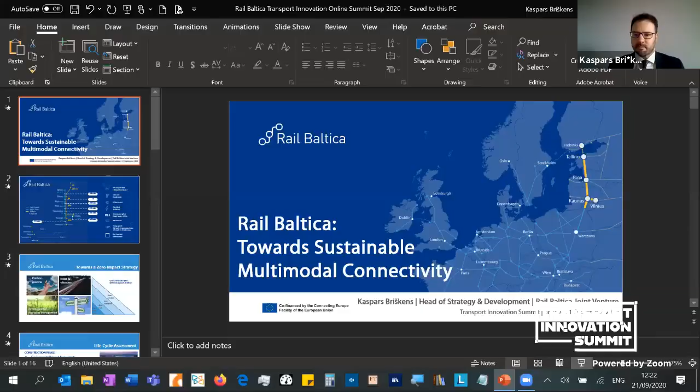Thank you very much, Norman, and many thanks to the Intelligent Transport magazine for providing us with this wonderful opportunity to take a few moments of your time to introduce the railway mega project in Northeast Europe, in the Baltic states, and also to describe in some detail our approach to sustainability. Allow me to share my screen and share a few slides with you. Right, I hope you can see the slides now.

So Rail Baltica is what we call the project of the century for the three Baltic states, because in terms of the sheer size, the volume, and also complexity of the project, there has been nothing of that kind in at least the past 100 years. So in many ways, because Rail Baltica is a greenfield railway mega project, we have the possibility of also developing a sustainability strategy with a life cycle perspective in mind.

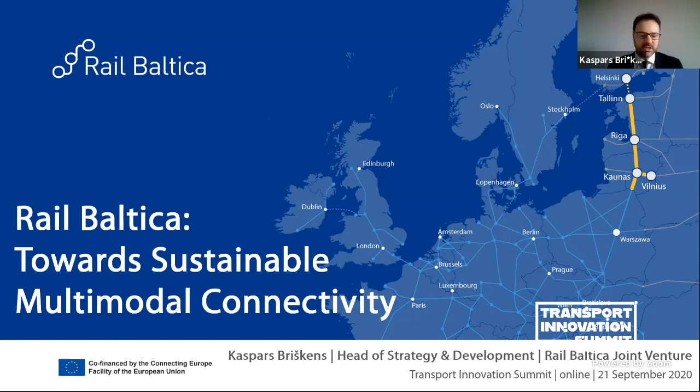And what is very important, even though the name is Rail Baltica, we certainly view Rail Baltica as something much more than a railway project, certainly more than just a railway construction project. Because as a super connector across the three Baltic states, also connecting Finland, connecting Poland and the wider region, it is very much about multimodal connectivity, and of course making it as sustainable as possible by capitalizing on this very unique greenfield opportunity.

So here are some of the key highlights of the project. The line itself runs almost 900 kilometers and almost entirely greenfield. It's European gauge, as opposed to the existing railway system in the Baltic states, which is wide gauge, 1520 millimeter. It runs from Tallinn, the capital of Estonia in the north, all the way to the Polish-Lithuanian border. And then on the other side of the Polish border, our friends in Poland are developing their connection, upgrading and building new alignment between Białystok and the Lithuanian border. So that is what is known as the wider Rail Baltica corridor.

And the Baltic joint venture that I am privileged to represent is taking care of the developments inside of the three Baltic states. So coming from Tallinn through Pärnu, which is the number 4 city in Estonia, to the city of Riga, also connecting Riga International Airport, then continuing into Panevėžys and Kaunas on the main line in Lithuania, and continuing then to the Polish border, with a spur line between Kaunas and Vilnius to enable a connection between the three capitals.

It's a mixed-use line, so it's a high-speed corridor for passenger traffic with speeds of up to 250, which is by any metric high speed here in the Baltic states, as clearly there is no connectivity at such level and such speeds. But also, it will have a very important freight component, with speeds of up to 120 for freight trains, and very importantly, also advanced parameters to enable high capacity freight shipment, also to encourage a lot of modal shift and modal integration.

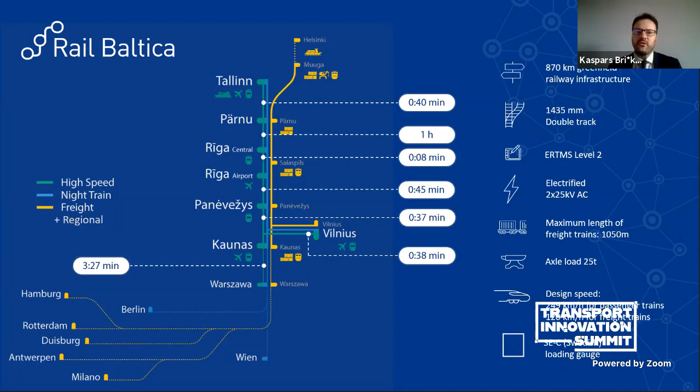One of the facilities will be located in the port of Tallinn, the port of Muuga. That will serve as the critical interface with Finland, as Finnish import and export is one of the key sources of future freight for Rail Baltica. And then also terminals in Latvia and in Lithuania.

Because we are a greenfield, of course, that allows us also to put in place a sustainability or a low impact or impact minimization strategy across the life cycle. And we are today in advanced design phase. As of next year, large scale construction works will also start in some of the point type objects, such as a few of the 7 large international stations that we will develop, but also, of course, increasingly and gradually on the mainline track sections.

Again, this is a line which is a double track line, ERTMS equipped, fully electrified, and of course, almost entirely greenfield. So certainly we will be looking towards the farther future into carbon neutral operations, hopefully with a 100% renewable energy use. We will be looking to minimize the noise and vibration impact. Of course, also waste minimization, environmental resources management.

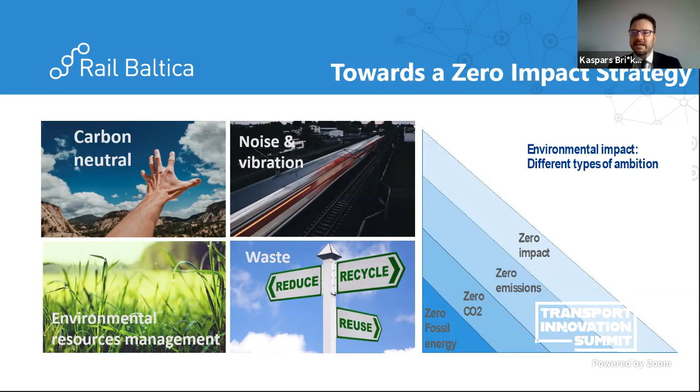And in terms of the level of ambition, if you go from zero fossil energy, which would be a relatively modest level of ambition for a greenfield project like Rail Baltica, and if you go further, we of course want to push that boundary and strive as much as reasonably possible towards zero impact.

And then in terms of the life cycle assessment and planning of our sustainability strategy, we differentiate, of course, between the delivery phase, the construction phase, which we're currently at, and the operational phase. And the construction phase is, of course, very much related to the environmental impact assessments underlying the route alignment, underlying the different point type objects.

And then, of course, going forward, we are thinking in great detail as to how do we optimize from a sustainability point of view our construction sites, in order to make them as compact as possible, in order not to interfere with the different protected areas, including environmentally sensitive areas. That also involves considerations related to the access to those construction sites, the traffic organization, fencing, security, and other elements.

At the same time, waste management and pollution, anything ranging from waste storage to wastewater, rainwater, hazardous material management, construction waste management, and again, also noise, vibration, and of course, dust and particle pollution. Those are critical considerations, especially during the construction phase, and especially taking into account that some of the elements of our infrastructure will be done in highly dense urban environments, including the international stations, and of course, the line segments connecting these important urban nodes.

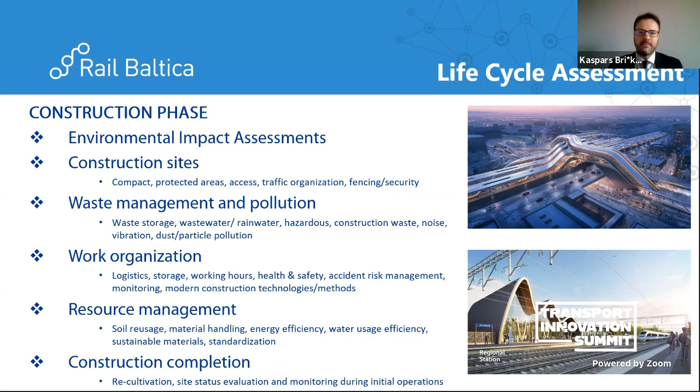And then of course, upon the construction phase completion, it is very important to continue site evaluation and monitoring during a few years of initial operations, just to ensure that the soil and the environmental conditions are safeguarded also during the early operational phase.

And then going into the operational phase, there's a slight delay on the slides, but one of the pictures that I'm featuring here is a Zaha Hadid rendering of one of our international stations, the Ülemiste station in Tallinn, which not only would be an architectural beauty, but has very important sustainability considerations underlying it, ultimately one of the signature stations along the entire Rail Baltica.

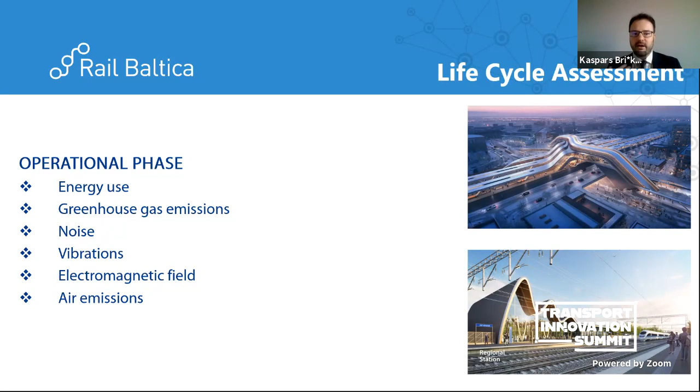But in the operational phase, this is not just about the traction energy. Again, this will be a 100% electrified line, but equally so, it is also about minimizing emissions, noise and vibrations, also electromagnetic field, the air emissions, particle emissions.

And just like during the construction phase, critical considerations related to water management, chemicals management, vegetation control, and also soil pollution management, and of course waste management and biodiversity and nature impact preservation.

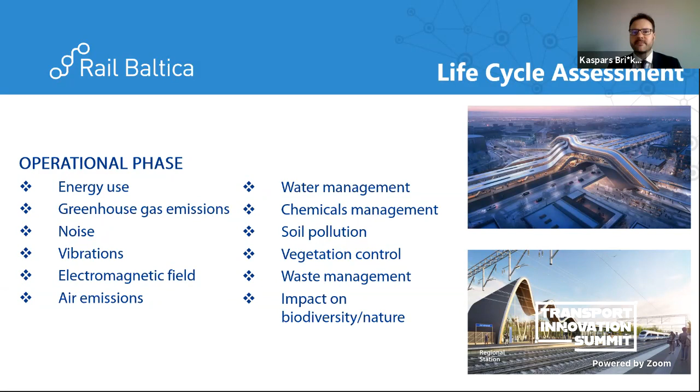And all of these we are considering already now, because as a greenfield, we have that ability, instead of working in a brownfield environment where we have to take care of maybe obsolescent infrastructure, obsolescent technologies, and that adds additional complexity into delivering a low impact infrastructure. In our case, we can take that ambition one level higher.

But in our view, and that's also the Rail Baltica philosophy, we are delivering Rail Baltica into a multimodal mobility ecosystem. So it's just one element in the wider either multimodal logistics supply chain or a multimodal passenger journey, where rail is one element in the wider chain.

But at the same time, in the Baltic states, currently there is no feasible rail connectivity on the north-south axis, that is across the Baltic states from north-south or south-north, neither for passengers nor for freight. So clearly the potential for modal shift is enormous.

Just to give you a few benchmarks, there are more than 5,000 trucks daily crossing the border between Poland and Lithuania. So that gives you an estimate of the intensity of truck traffic along the Baltic states. You have Baltic import-export traveling on that route, you have Finnish import-export traveling on that route, in parallel to the short sea shipping routes, which are also traditional gateways for Baltic or Northeast European trade channels.

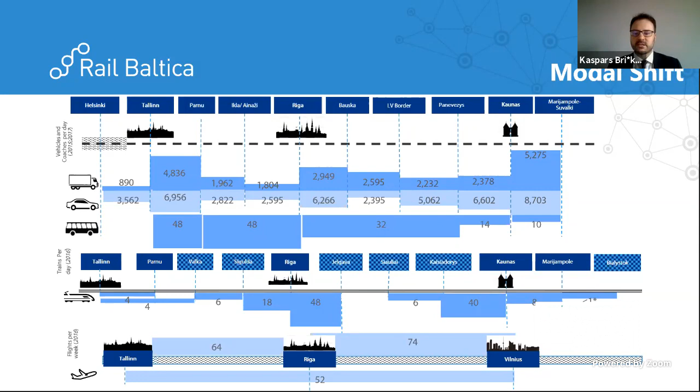And through that also encourages not just the modal shift per se, but a more sustainable distribution of different elements across the supply chain or the logistic chain. So when we talk about freight, clearly we are looking mostly for general cargo. That will be the bread and butter of the Rail Baltica line in terms of freight. So a lot of that is intermodal, either between the existing wide gauge system and the European gauge, or truck or road-rail intermodal, including options for piggyback traffic, unaccompanied or accompanied.

We are studying these options, and also a lot of options for less than wagon load. So not every freight owner and not every logistics integrator has the capacity in the Baltic states to form a block train, even though we'll have a fair share of those. But very important to also take care of less than wagon load. So that is absolutely critical.

To enable that is to have these terminals with dry port functionality. Some of those will be directly connected to maritime ports. Again, they will be located on the crossroads between the existing wide gauge and the European gauge. And that in itself should facilitate that, as much as possible, the haul should be as long as possible, and the economies of scale of rail freight should be taken care of.

At the same time, also promoting a strategic cooperation with the trucking industry. They're allies, they're not just competitors, because of course first and last mile distribution is absolutely critical also to enable that, to encourage that modal shift. Otherwise, rail is oftentimes not competitive, especially with the fact that there is not really yet a level playing field also in terms of legislation between road and rail.

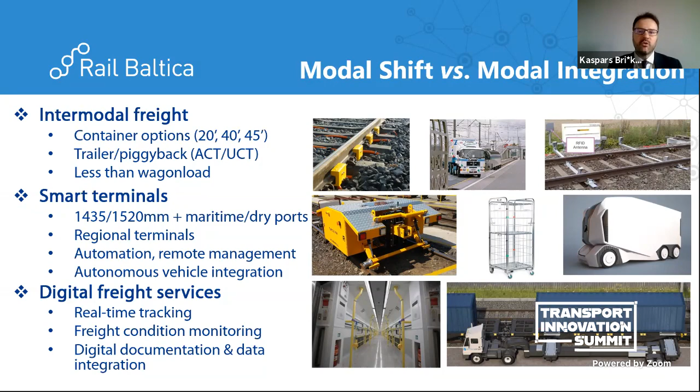And digital integration, not just on the rail portion, but across the multimodal supply chain. So railways should be able to talk to the trucking industry, to the air industry, to the maritime industry, and that should work as one unified supply chain solution for the ultimate freight owner or the lead logistics provider.

And the final slide on air to rail connectivity. Again, there's a lot of discussion about rail replacing air passengers. There's certainly a place for that, especially for short haul and ultra short haul flying. And clearly there's a potential of that in the Baltic states. But equally importantly, it is also to ensure that air and rail are fully and seamlessly integrated.

And as a greenfield, we have that opportunity to put infrastructure in place to actually enable future seamless intermodal journey opportunities for the passenger, including with things like interline and code share single ticketing between the rail operators and airlines, single check-in for the entire journey.

Also, we are working on integrated baggage solutions, especially with regard to our international rail stations. You should be able to drop your bag in any of the Rail Baltica international stations and then go to any of the airports along the Rail Baltica route and receive your bag in the final destination. As long as the business case is there, we will put the infrastructure in place to enable that.

And equally so, this is my final remark on the intermodal logistics side. Clearly, there are major opportunities for air freight integration, especially with the rapid development of e-commerce, also high value-added logistics services, including reverse logistics, customs processing, also smaller industrial operations like assembly logistics, labeling, packaging.

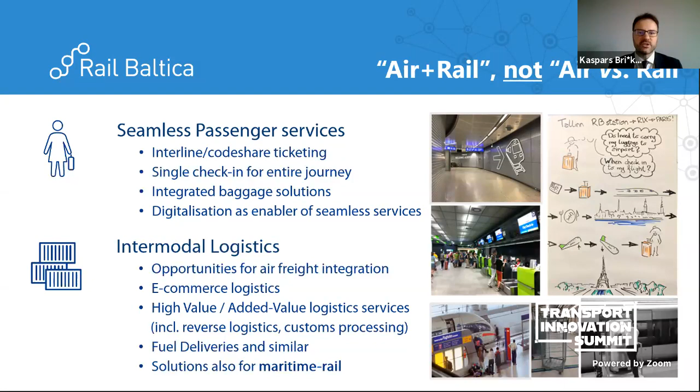Thank you. Kaspars, thank you very much indeed. A very ambitious programme, and good to see that so much thought's been given not just to proper planning, but also to the environmental sustainability of what you're planning to take forward. And that leads me on to another ambitious programme, which we're going to hear about from Rob Paris, Head of Sustainability and Consent at Crossrail Limited, which is of course the new line across central London. Rod.

Thank you, Norman. Good morning, everyone. Right, I'm just going to get all these tech pieces out of the way first. And that should get the screen share up. Good. And one final click. Who knew that the most daunting part of a presentation might be clicking some things as opposed to giving the presentation itself?

So I'm going to talk to you about Crossrail and carbon reduction this morning, but the first thing I'm going to do is not assume you all know exactly what Crossrail is and just do one slide of introduction, setting the context framework on which the rest of the presentation should sit nicely.

So what is Crossrail? It's a new railway scheme, not a new tube line as some people think. It's a metro style stopping service running across London and the southeast. And it consists of two main parts, a surface section, which you can see here in blue, and that is located on primarily existing railway corridor, mostly the Great Western Main Line and the Great Eastern Main Line corridors.

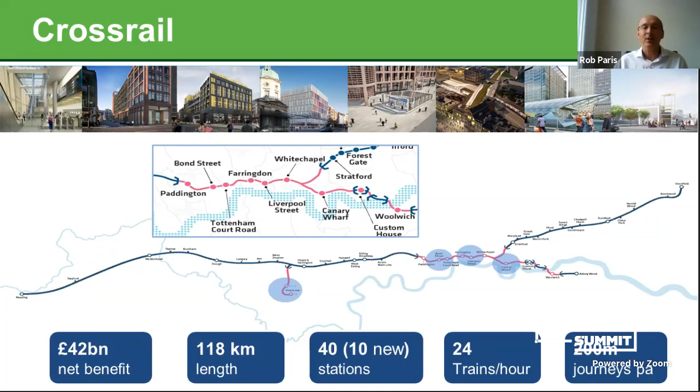Last piece of useful context. The powers and the deemed planning permission that enable us to construct Crossrail come from an Act of Parliament. It's known as a hybrid bill scheme. Some of you may be familiar with things like Transport and Works Act orders or Development Consent Orders, but our powers come from an Act of Parliament. So like High Speed 1 before us, and indeed High Speed 2 now.

The reason I emphasise that slightly is because the Crossrail Act 2008, that's when it got royal assent, was the same year, of course, as the UK got its Climate Change Act. And it's worth reflecting that in the years that have passed, now there are a lot more tools, drivers, policies and experience that have helped facilitate carbon reduction. But back when we were kicking off, moving into a delivery organisation, a lot of that didn't exist or was very much in its early stages of evolution. So there was a lot of learning to go through.

We put together a carbon footprint policy in 2009. And we had a certified EMS by 2010, within which we put energy and carbon footprint reduction targets and objectives, and some of those will come out as this presentation progresses. So also in 2010, that's when we really put together our main baseline carbon footprint.

Crossrail has a design life of 120 years. So it came as no surprise that almost 80% of the carbon footprint for Crossrail comes from operation. And the majority of that is through locomotives and operating a passenger service, and only a very small percentage of that is the actual energy consumption of the infrastructure in the stations, the shafts and the portals. Crossrail is actually powered by the grid, so it's very much dependent on the grid mix as to how that carbon footprint comes out. And in construction terms, you'll see that in round numbers, about 20% is construction carbon or capital carbon as it's considered.

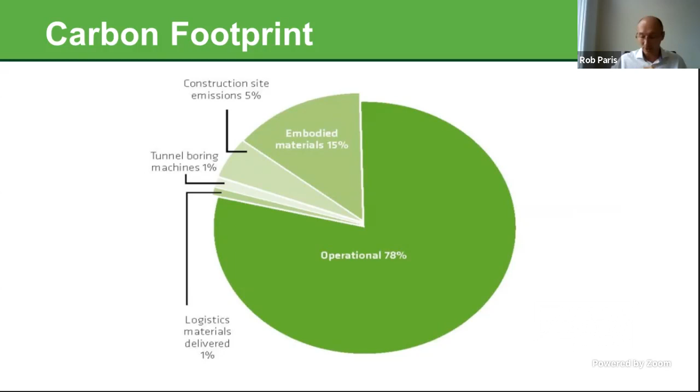And the final thing to note is that when we did that carbon footprint, we replaced a lot of old diesel passenger services. So in comparison to a do nothing scenario or a do minimum scenario, there was going to be a carbon saving by the operation of Crossrail. And that meant that in round numbers, between 8 and 13 years, we could get a carbon payback on the construction, which is a very fortunate position to be in. And that range just depends on things like assumptions about what the energy efficiency might be of the various trains and what the grid mix carbon will actually be in the future.

So the sorts of things that we could impact upon are the energy during construction, the embodied carbon, the first generation of rolling stock, and the first generation of the mechanical and electrical plant that went into the system itself, the infrastructure itself.

And so taking you to the beginning of that, when we looked at design, we decided to set holistic design targets in terms of sustainability rather than specific. So we didn't have specific energy targets in the design, but for our stations, our central section stations, we adopted BREEAM, Building Research Establishment Environmental Assessment Methodology, a leading methodology in the world today and at that time.

And we set a target for all our central stations of achieving a very good certification, both in design and assessment, and a stretch target of excellent. And for the civil infrastructure, the tunnels, the portals and the shafts, we adopted CEEQUAL, the Civil Engineering Environmental Quality Award Scheme, and we targeted excellent for all of those.

And speaking to you today, where we're at, all of the civil infrastructure has actually come in at CEEQUAL excellent. And on the stations, we're still going through that, but 3 of the stations have come through certification. 2 of them have achieved very good. 1 of them has achieved excellent. The remainder are on target for very good, and 2 of them could possibly achieve excellent too, which would be a wonderful outcome.

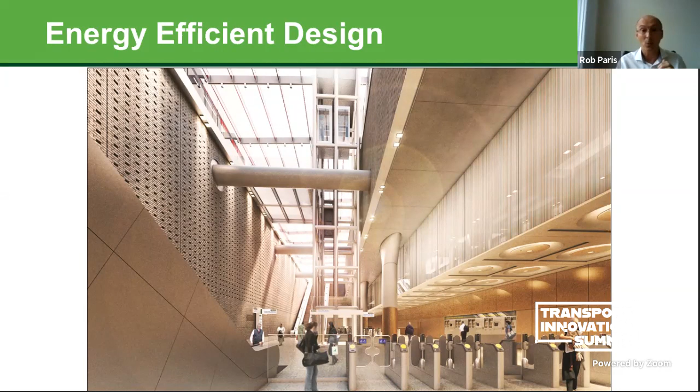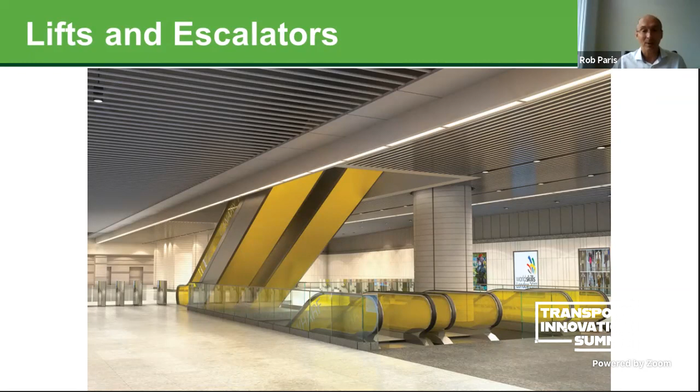Lifts and escalators was another big one that we could affect in terms of specification. Again, go back to that time, we were looking around to see what the baseline was, what good was, and we could see what the London Underground standards were for lifts and escalators. And we specified lifts and escalators that would be about 23% more energy efficient, and again, used LED lighting and these sorts of elements. And whilst we're still in the testing and commissioning phase, it is coming out at about 23%, which is really good. So that's the specification, that's the tech, if you like, inside the stations and the infrastructure.

I've mentioned embodied carbon. Now, Crossrail, for all its complexity, and it is a hugely complex scheme, when you look at the materials, by far the greatest volume is in concrete and rebar. If you're going to build that amount of tunnel and have that amount of subsurface station, there's a huge amount of that that goes into the construction. So on the concrete, one of the places we could focus to bring carbon down was on cement replacement. And we had a minimum standard in all the cement mixes of a 50% cement replacement, but we encouraged all of the contractors to do better than that where they could. And indeed many did. And the top performer was actually Paddington Station again, where they managed a 72% cement replacement with associated carbon reductions.

Couldn't always achieve that sort of level because around the concrete performance, there's requirements you have to meet, and so that affects how much replacement you can put in. And sometimes the curing times can affect that, and depending on how quickly you need it to cure, you can't always go as high with replacement as you'd hope. But those were some of the things we did, and there was quite a big win we had on the embodied carbon side.

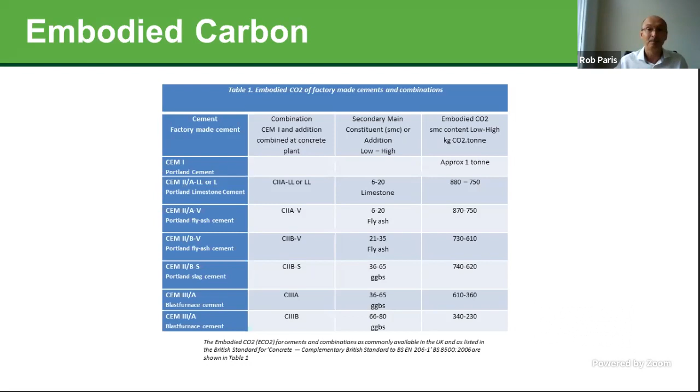Construction carbon, the activity of construction. Now, this was an interesting one. When we were setting up the contracts, we went out to the market and we asked what experience people had, projects had, of setting carbon budgets or energy targets to drive down construction carbon. And really nothing came back at all. There was really nothing that came in, or certainly nothing you could apply to a project that was the size and scale of a railway project

like Crossrail. So we took the approach that once we procured all of our contracts, we gathered all the contractors together and we asked them what they thought would be a fair target to try and achieve. And they came back variously with numbers of between 4 and 8% construction target. So we adopted 8.

And what we also did was, in order to be able to measure that, working again with the contractors, we developed a construction carbon model that we could apply to each site. And each site then had a reference or baseline model that was set up for it. And then when they adopted certain energy efficient technologies like LED lighting or hybrid equipment and plant, that then achieved certain savings. And that way we could track and measure the performance in terms of meeting that 8% carbon target.

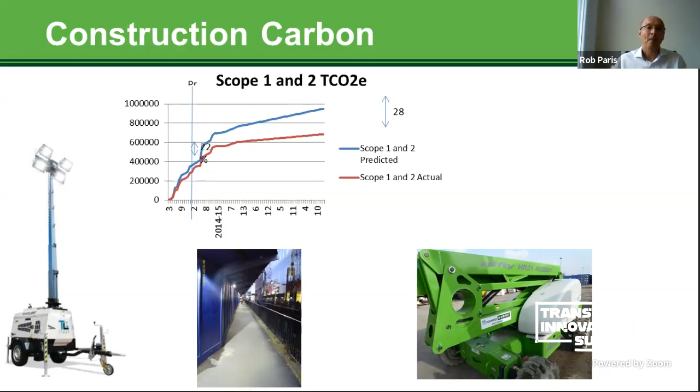Now, because we did this post-contract award, these weren't targets that were in the contract, so we needed a way to facilitate and encourage meeting that target. So I'm going to make a very small diversion, but it is a relevant diversion, as to how we actually encouraged that during the delivery of the project. And that was with something we called Supplier Performance Assessment.

Now, the Crossrail contracts had a lot of requirements in them, and we wanted to know how the contractors were going to perform against those. So the various areas we were interested in are shown on the left: environment, health and safety, commercial, and the other ones there. And so on a 6-month basis, we would effectively go out and audit the contracts, and we would be able to see were they compliant with the contract, non-compliant, or were they even going further, what we call value added. And in some cases, they might even be leading edge in the industry, what we called world-class performance.

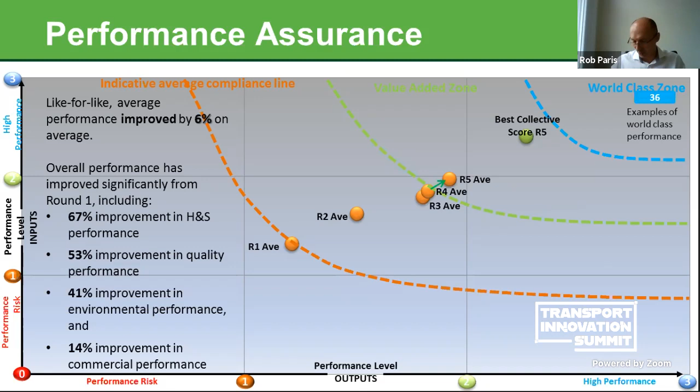And what that enabled us to do was get a graph like this. And here you see over 5 of those assurance assessments, all of the contracts in all of the areas and how they performed. And you can see that on average, we started off at a broadly compliant level that moved up into that value added, and then it slowed. And that's not surprising when you consider what value added means and how difficult it would be to get everything up to world class. And you could break that out into the various areas.

So this is the environmental performance. You can see the averages in the golden triangles there over the 4 periods. But the great part of this was that each contract could be identified individually and its performance tracked on the graph. Each of those blue circles is a contractor. Now, because we put this process in place, again, after the award of the contract, the buy-in we had to sell to the contractors was that we would make it anonymous. So they each knew what their number was, but they didn't know what their peers' number was. That was the deal that got them to buy into the process.

What was fascinating was that the very first time we did this, we had our contractors forum and all the delivery directors from the contractors turned up. And no sooner had we put this chart up than they all started asking each other what number they were. So in no time, anonymity was out the window. They all knew where they sat. And what then developed was this wonderful, healthy competitiveness, because none of them wanted to be seen to be lesser performing than their peers. And that's what really helped to drive that performance that I was mentioning earlier.

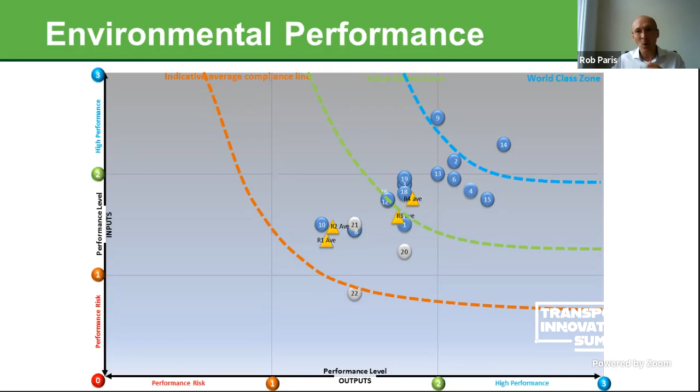And it's worth bringing in a second element that we came in with to facilitate meeting that 8%, which was that at that time we had Crossrail delivery directors, and there was an incentive scheme for them. There were various things in that incentive scheme to drive a bonus, and one of those was achievement of the 8% target. And why do I highlight all of that? Because whilst we set a target of 8%, we actually achieved, in 2018 when we closed that scheme down, 18.6%. So that was a really wonderful outcome in terms of driving down that construction energy.

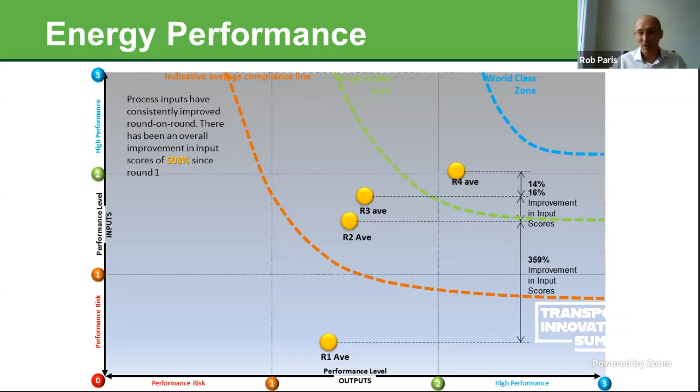On the operation, we set two main targets here. One was train weight. We set a target of 350 tonnes for a 9-car consist. Around that time, industry was going for something like 400 tonnes, so we directed for under that. And an energy efficiency of 24 kilowatt hours per train.

Bombardier, based up in Derbyshire, were the successful contractor for this. They brought some of their aerospace engineering experience to bear, and they smashed that weight target, coming in at 319 tonnes. Our new trains are 319 tonnes. And when we were doing testing and commissioning about a year and a half ago, we were coming in at about 14 kilowatt hours per train.

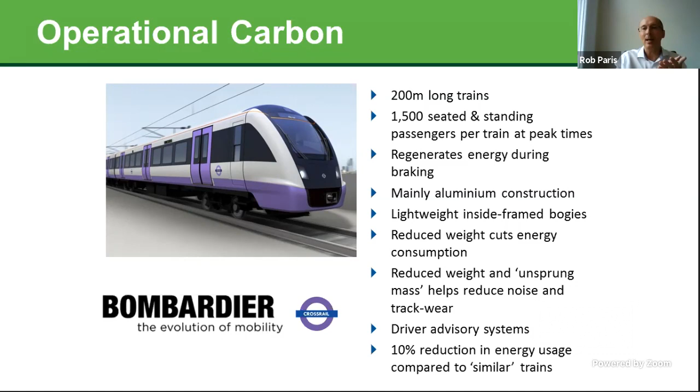My final slide is just to say, so what was the outcome of all of that? Well, we're still finishing the delivery. We're still wrapping up a final carbon footprint, but I mentioned that 8 to 13 year payback period. It looks like we might be able to claim that we've shaved a year and maybe even 2 years off of that, maybe between 8 and 11 years, which if we've done that, we'll be very happy.

Now, I've given you a real whistle-stop tour through our carbon reduction measures, but if anything of that was of interest to you and you'd like a lot more detail on it, and believe me, there is, we've developed this Crossrail Learning Legacy website, and you can find case studies, best practice examples and various papers that will give you a lot more information on all the items that I presented to you this morning. That's it from me, except to thank you very much for your time and attention.

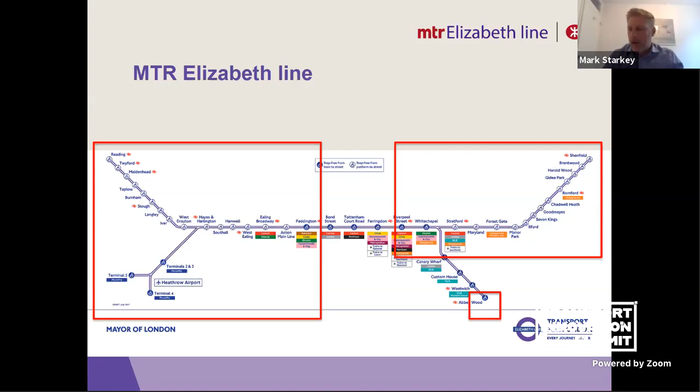So from Shenfield in the east into Liverpool Street, we also run Abbey Wood in Kent, and obviously we run trains from Paddington to Reading and to Heathrow on the west. So something along the lines of 11 stations on the west, 12 stations on the east, and obviously the train services connecting those separate legs. We look forward to connecting the middle part as well in the near future.

So we've talked a lot about carbon targets. We talked about the 2050 target in Andrew's presentation earlier. Is zero carbon really realistic? Well, I think that's probably a bit of a wider debate to be had, certainly above my pay grade. But I can give you the MTR perspective or an operator's perspective.

We've got a short-term contract. Our contract is 8 years, starting in 2015, with an option for 2 years. So only really a 10-year contract. That makes long-term investment decisions quite difficult for an operator, for a concessionee, if you like, or for a franchisee, for the DfT franchises. Whilst we've had no involvement in the design specification, Rob talked about setting the carbon policy back in 2010, and all the design specifications around that. We've had no involvement in that.

However, we're pleased, obviously, to be involved and receive these energy efficient trains and stations that Rob's worked so hard to deliver to us, and we hope we can run them in an equally efficient way. Our view really is that we are not looking to eliminate carbon emissions. We are looking to manage and reduce as much as possible in the time that we have in being the operator for the Elizabeth Line. So what does that mean in terms of the various items that we have to look after?

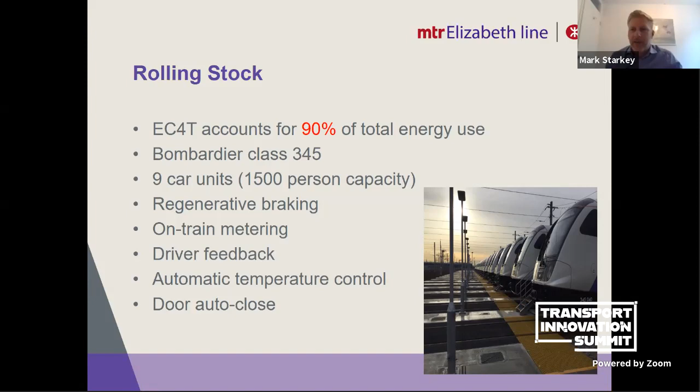We've only recently just got rid of the 360s as well from Heathrow Airport, so that's been a challenge for us. We know that 345s at the moment, whilst they have these fantastic energy efficient technologies such as regen braking, which is ideal on a metro style operation such as ours...

The regen braking isn't operable currently. The train metering isn't operable currently. We can't feed back information to drivers currently. So unfortunately, until we get that fixed, we're a little bit stuck in terms of the information we can provide to drivers and the decision making we can take to reduce energy consumption with regards to rolling stock and train operations.

However, what we can do to reduce traction energy is around how we operate the trains, our train operations. Just remember that 90% of our energy usage is relating to train operations. It's important for us to have efficient diagramming, minimizing empty coaching stock. Moving fresh air around is not particularly environmentally friendly, not particularly energy efficient for a train operator, so reducing those non-essential journeys. And again, that's difficult for us because of the delays in the project.

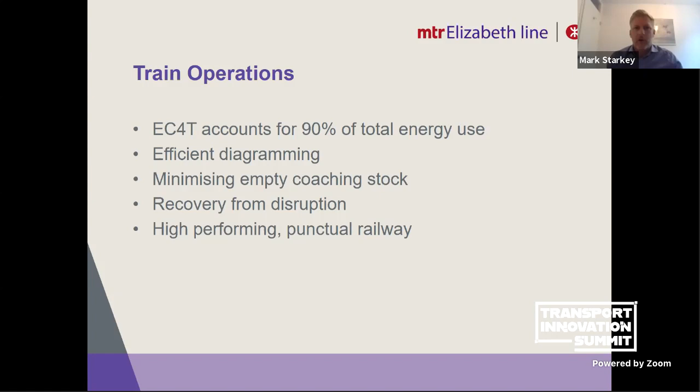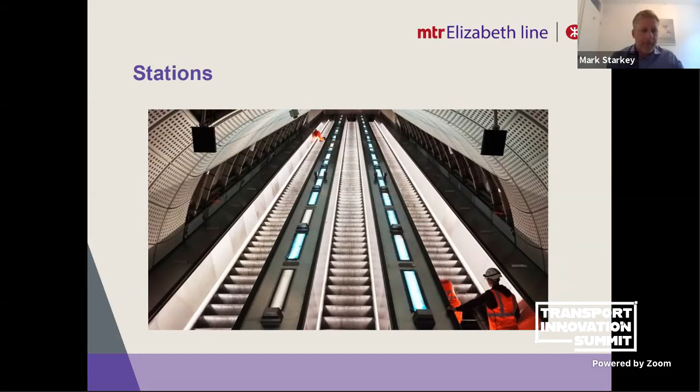Rob has already highlighted all of the environmental and energy advantages of the fantastic stations. If anybody has had an opportunity to go to any of the Crossrail stations, you'll see they are cathedrals. They are absolutely magnificent, fantastic design, energy efficiency baked into the design and the construction, and a real asset to the project. However, we haven't got those yet. Rob's going to deliver them to us shortly, and we look forward to working on them.

We've spent a lot of time, a lot of money retrofitting stations with LED lighting, which is now proven to be of a massive benefit in terms of carbon reduction. We've retrofitted automatic meter readers, really important, as with the trains.

You can't manage what you can't measure and monitor, so that's proved really, really effective for us. And we've made sure that when we refurbish stations, we have energy efficient specifications such as water saving features, LEDs, PIRs, effective glazing, etc., and solar panels for things like help points and smaller appliances like that. We've also switched to 100% renewable electricity and gas supplies. Really simple thing, but that does help us, and it's the right thing for us to do.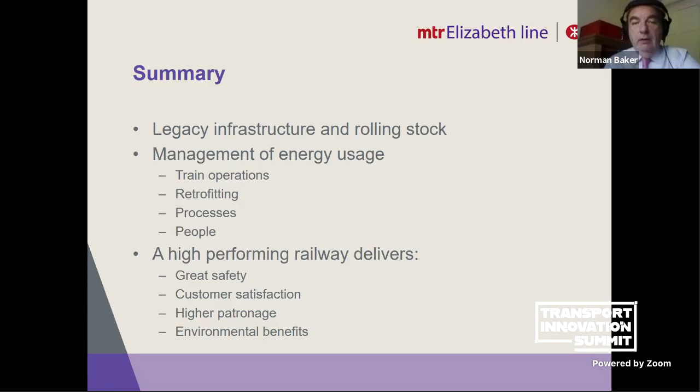Mark, thank you very much indeed. And we've got a few questions which have come in now, which I'll try to run through. I'd be grateful if people are able to answer them as quickly as you possibly can, so we can get as many in as possible.

The first one I've got in front of me comes from Stefan Hug from HBI Harter Consulting Engineers, particularly for Andrew. My company, based in Switzerland, has been looking to reduce the energy consumption through smart train speed profiles for a given route. Is that something that is feasible for the UK, or does it not yet have the necessary trackside equipment or rolling stock?

It's something we're looking at. I didn't mention it, but we've been doing some first-of-a-kind studies which have been looking at modelling particular rail journeys. And one of the things we're interested in doing is looking at how we do route journey optimization, both in its own right and across the system as well. So that's certainly something we can look at. Okay, that's great, and thank you for your brevity there.

One for Rob. Since construction began, what has been the most difficult sustainability challenge to overcome? Have you had to adapt along the way? Sticking with the carbon, it was actually developing a baseline to start with, because when you set a target, what is that target against? So the biggest challenge we had was, in fact, forming those baseline or reference sites, as I called them. So getting the model together, that took some time, and we did that working with the contractors, a lot of contractor input. So all congratulations to them.